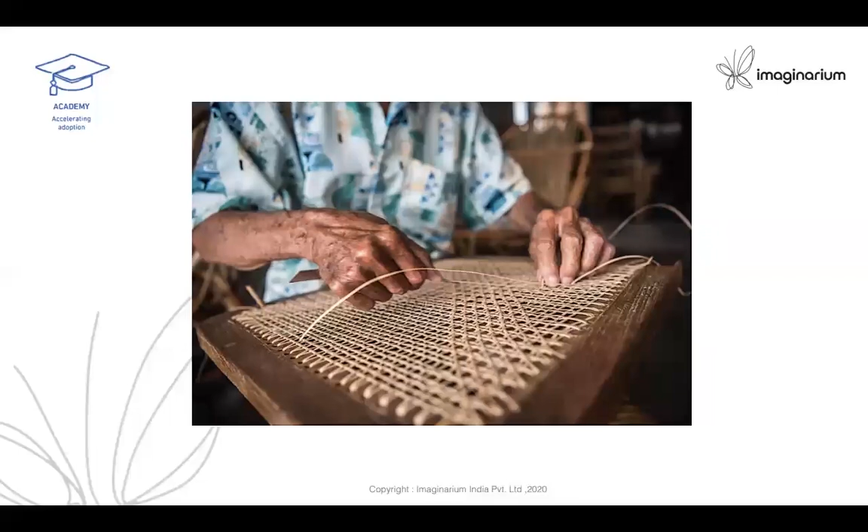and make sweaters for us, those kinds of things came. Even today, a lot of things are being done by hand, like making baskets, etc. And with all of them, one cannot make a thousand numbers.

Only a few samples can be made and sold. So the industrial revolution is a period when people wanted a lot of things to be made, sold, and consumed. That led to a different order, different types of technologies.

Man had to develop machines in order to do that. We all know that for a long time, pottery, as you see here, was one of the early artifacts made, and this was done in different ways.

It was made like on a lathe, where you put a thing and use a cutting single point tool to shape it, on a potter's wheel, as one shapes it even today. We also have another way of making things.

This is called pinching. You take clay and start pinching it, and it expands, and you get the entire pottery made that way. It's a vessel to contain something. It can be water, it could be,

I'm so sorry to interrupt you again, but I think the screen share has stopped again. On your share screen, do you see an option to share with attendees as well? We're getting complaints that it's not visible. No, I think the attendees have to pin it.

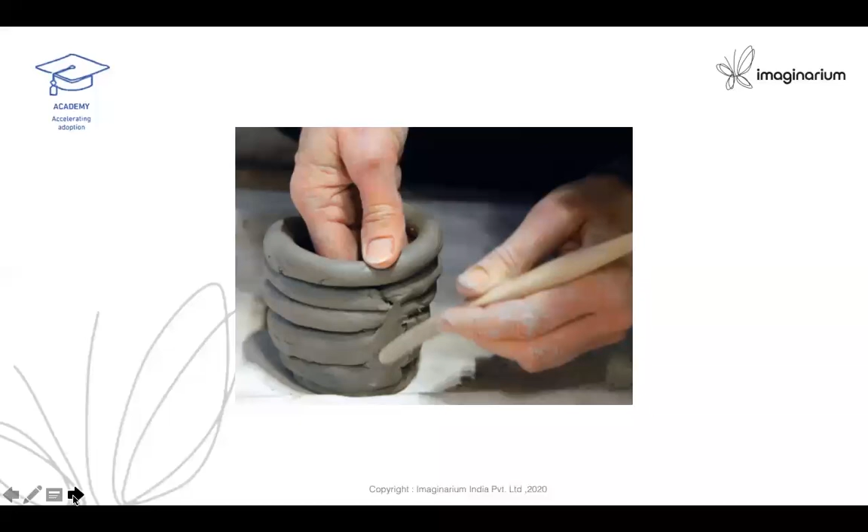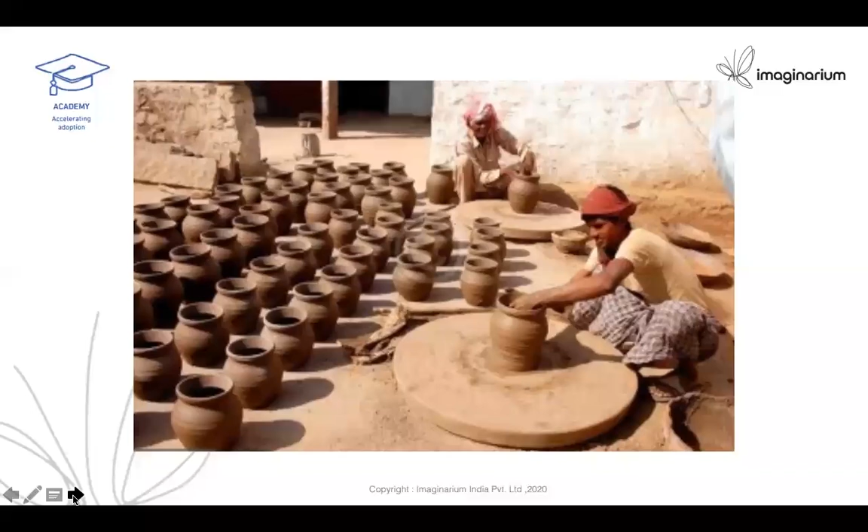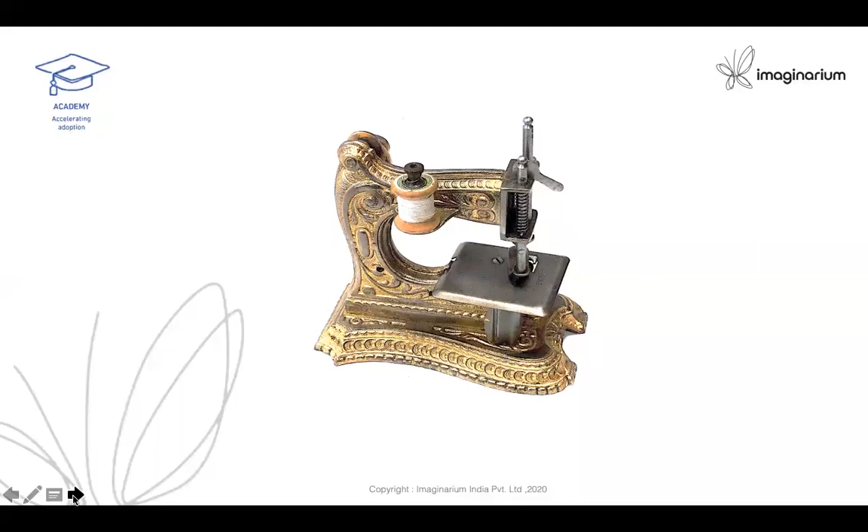See the ornamentation here, so beautiful. They depicted nature, and nature is the best designer. People used to have a liking for nature's flowers and animals, and they used to make them part of their lives. It used to reflect everywhere in their ornaments, in the house, the furniture, the utensils, whatever it used to have. The same thing you can see till recently - even machinery used to look like a very ornamental thing, like a piece of jewelry. What you see here is a sewing machine of the early days.

And then came the so-called different industrial revolutions which changed all this. Let us see. The production technologies can be divided into three main broad categories called plus, minus, and zero processes. Let us understand what these are.

The manufacturing process is broadly classified into plus additive manufacturing processes, zero or forming processes, and minus subtractive processes, in which you have so many things. Under plus, you have casting, welding, cladding, painting, plating, gluing, lamination, coating, and of course 3D printing.

Under zero process, you have bending, extrusion, drawing, forming, forging, coining, rolling, knurling, embossing - all these processes. Under minus, you have turning, shaping, milling, drilling, planing, broaching, trepanning, sawing, reaming, grinding, filing, chipping, all of them. This is like sculpting.

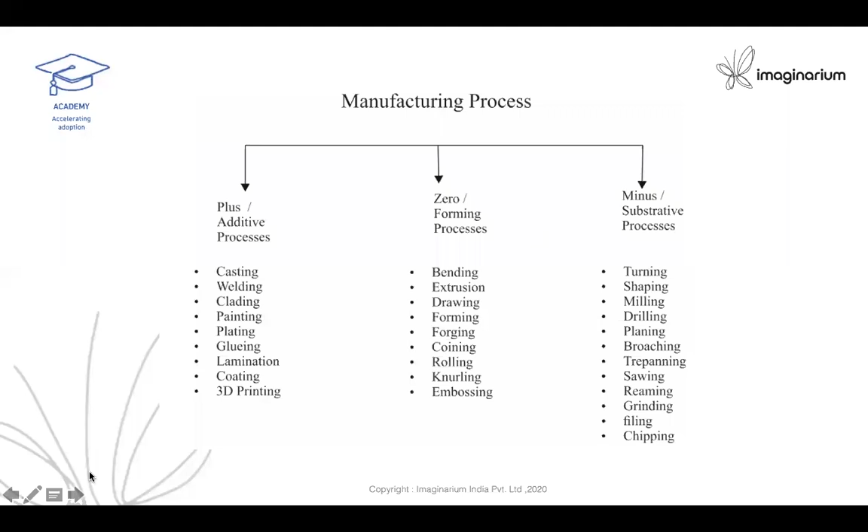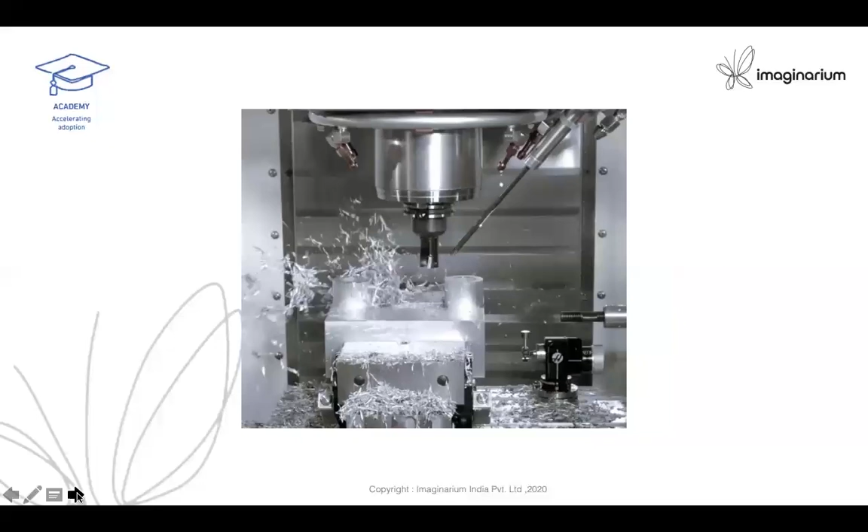This whole thing led to conventional manufacturing, which we normally call subtractive, where we remove chips out of metal and shape it, like milling, where we again remove material. All of this leads to a lot of chip generation. So this was not at all very good, to generate so much waste and remove a lot of material.

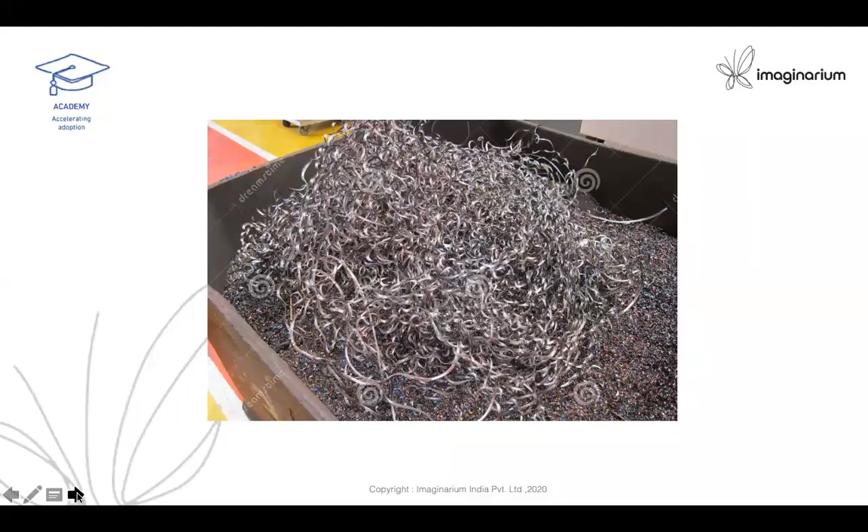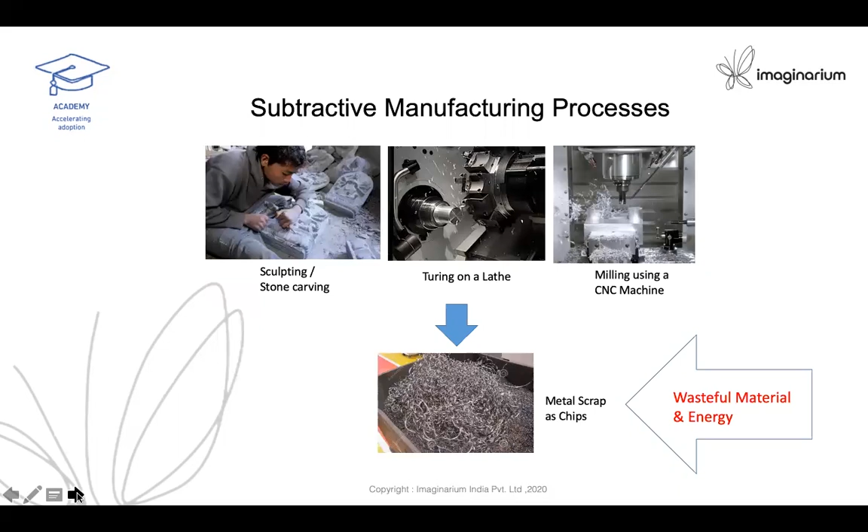So people thought this is a kind of process which is not good, and there were a lot of other ways of making things. Can we add material and make it instead? So casting was one of them, which was developed where you get the shape directly.

The Industrial Revolution 1 brought a lot of energy into human hands. So human hands were not shaping anything now. The machines were there - they were able to make a lot of things in a short time.

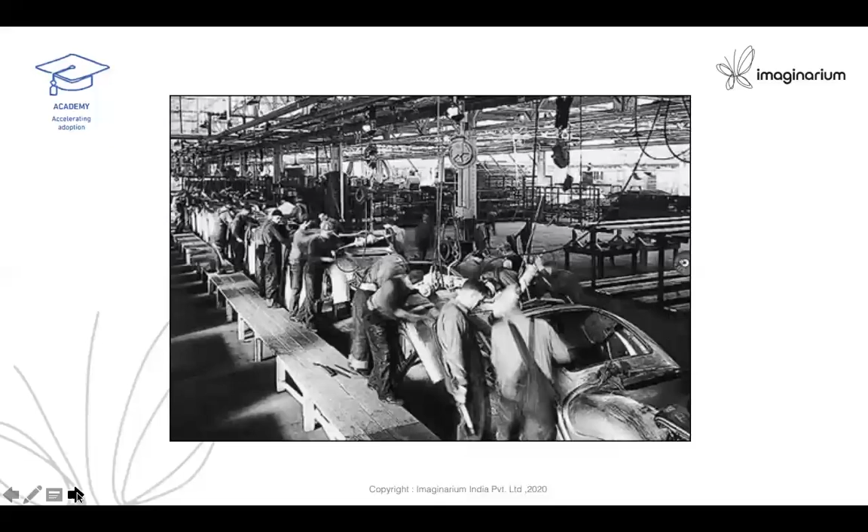Then came Industrial Revolution 2, which brought in the production line. The chassis enters one side of the factory and goes out as a car with four wheels, and the whole line is called the production line. This was implemented at Ford's factory. What you're seeing is an early Ford factory - a lot of people doing just some job, and it used to move forward.

This industrial revolution brought in a lot of limitations into the so-called production system. The ornamentation went off. In the world, we could only make horizontal and vertical things, or at best something round, something triangular, things like that.

This became a new aesthetic to the world. We started calling it a minimalistic approach. Today we have Apple, which is a great icon of the minimalistic approach of design. And very much like our houses, which are boxes today, we find everything which is a box. And we say creativity is out of the box.

Because all this came as a limitation of the process, the machining brought in these limitations, and the limitation became a new order. People said, okay, it is like the jackal says - if I cannot get grapes, I think grapes are sour, I don't like that. So we got used to this kind of new aesthetic, which is minimalistic, made up of horizontals and verticals.

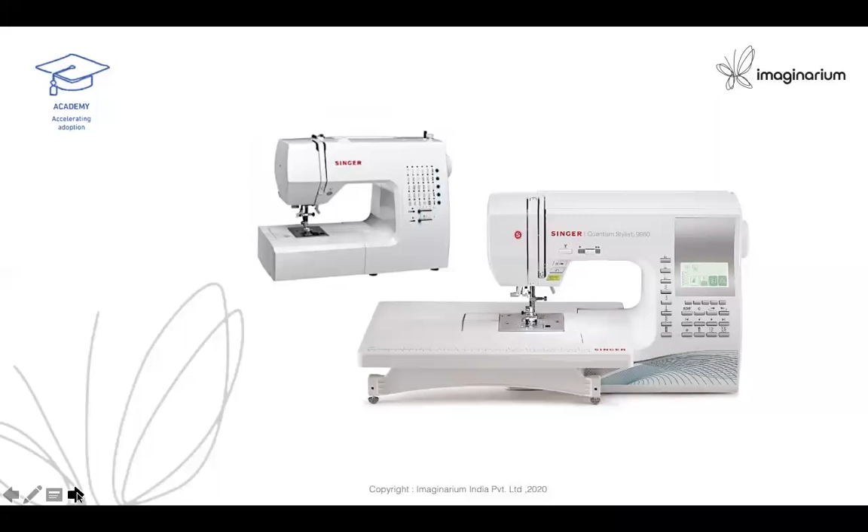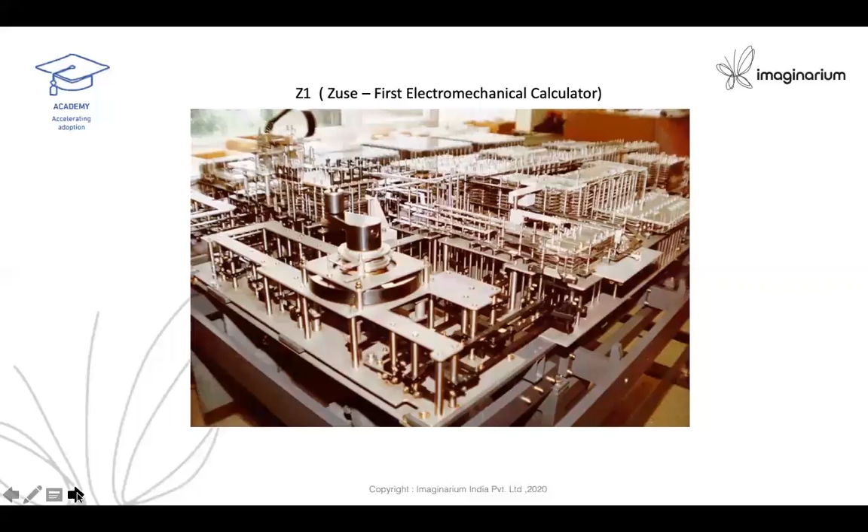Then came Industrial Revolution 3, which brought in the power of computer and computing power. What you are seeing on the screen is the first electromechanical calculator, which was huge, like a big room. It brought in a lot of things like automation, robotics, and telecommunication technology also got implemented - the development from valves to transistors to IC also came in the third industrial revolution.

Today we are stepping into the fourth industrial revolution, having crossed the first, second, and third. We are stepping into the fourth industrial revolution, wherein we are going to have autonomous robots doing everything, with very little intervention of humans required, and we call it a cyber physical system.

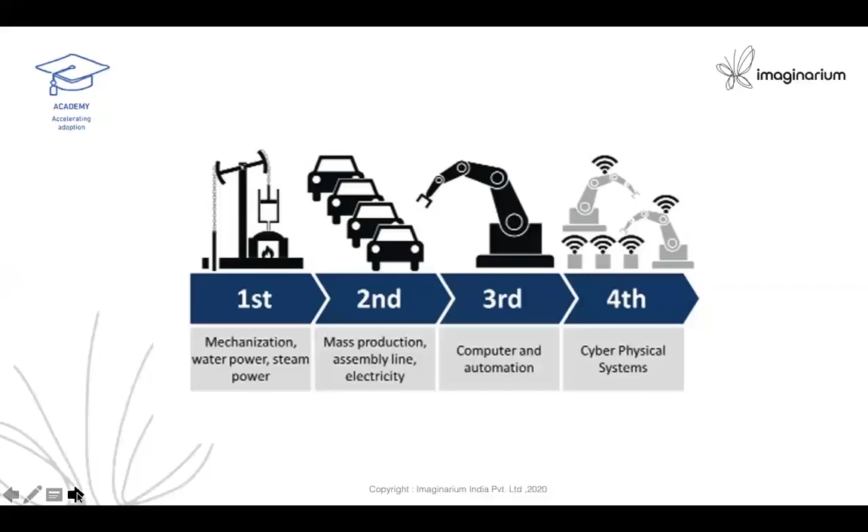Moving forward, today's topic is 3D printing, which we call the next big thing. For the last 30 years, it has been the next big thing. This is because it has to actually create value. Unless 3D printing creates value, industry and people will not adopt it. But today, I can say it has actually arrived.

People have got technologies by which you can actually manufacture. Additive manufacturing—sometimes I don't call it additive manufacturing because manufacturing is a highly loaded term. What is manufacturing after all? It is making millions, not making one or two or making hundreds. So additive manufacturing, I sometimes call it digital fabrication.

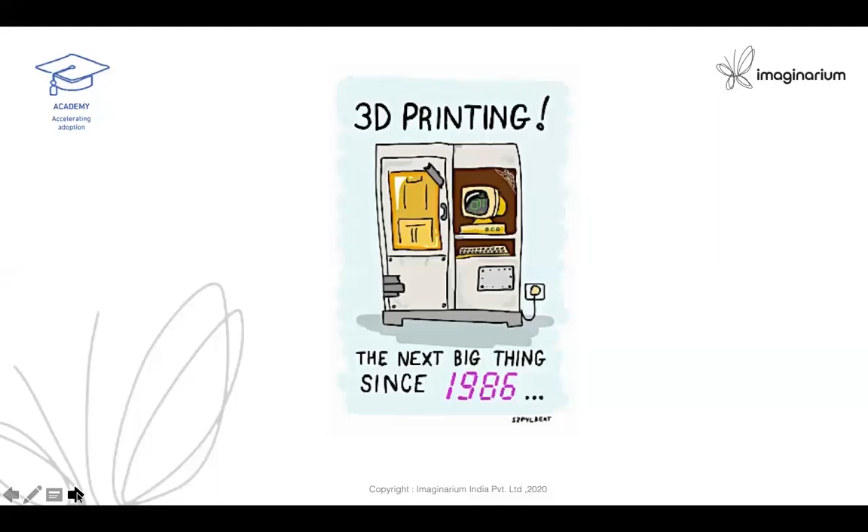Moving forward, in 3D printing we have the first term called printing. What is printing, by the way? Printing is a process of reproducing text and images. In case of 3D printing, it is a process of printing not only text and images, but also objects. That's where we call it 3D printing.

Sometimes people come and say, I want something 3D printed, and they'll give a small 2D artwork. Many times they think that it is going to be printed in 3D, because a 2D plane looks like a 3D. But it is not so. Many people have a misconception. So printing and 3D printing are way apart. They're not the same.

I can say in the world we only have printing, 2D printing. 3D printing is something which is an integration of 2D printing done over and over again.

Many times we call 3D printing also as additive manufacturing. And when you say additive, there are a lot of things which are additive in the world. Plywood is also made up of additive, but it is not 3D printed. Bricks, buildings are built of bricks like a Lego, and again, it is not 3D printing, but it is additive. Casting is also additive, but it is not 3D printing. Joining of metals like welding is also additive, but it is not 3D printing.

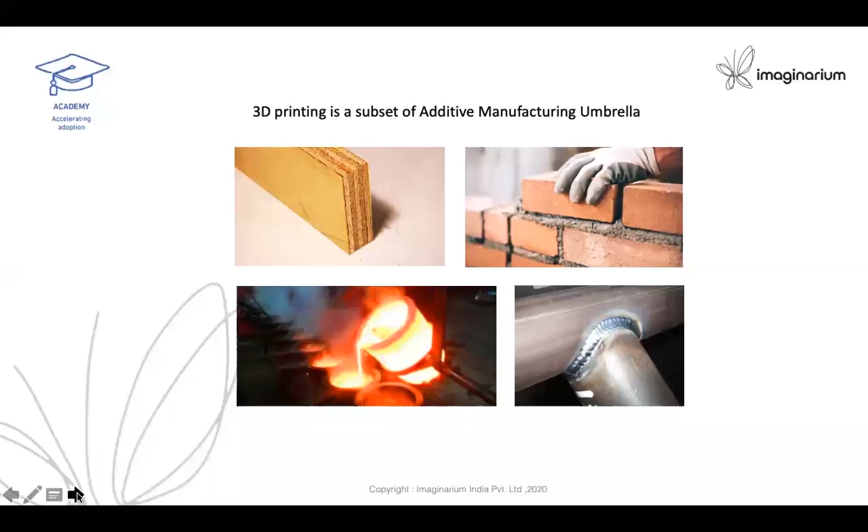So there are a lot of things which are additive, and 3D printing is a subset of additive. So 3D printing is a new way of making things, and many people think that 3D printing means it is made up of filaments. It's like a set of blind men going and touching an elephant, and whatever they touched, they felt so, and they declared this is what it is. Elephant is like a fan. Elephant is like a tube. Elephant is like a pillar, like that.

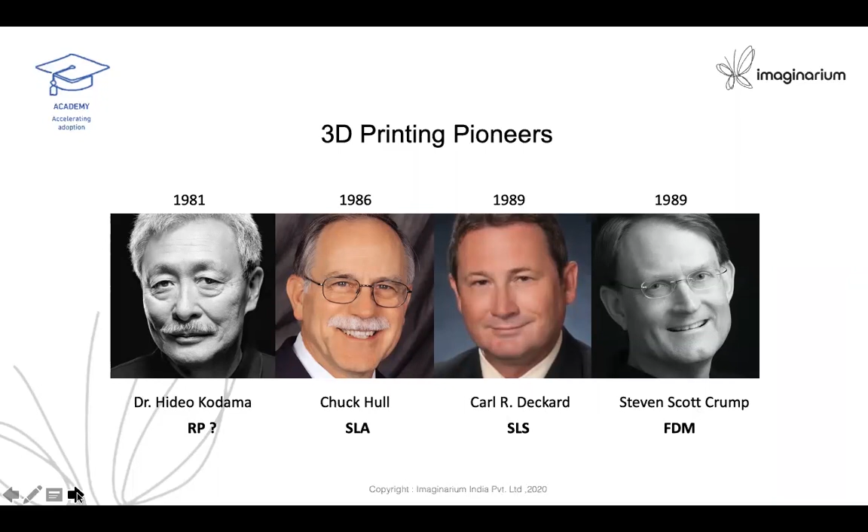So these are some of the pioneers who actually brought in all these different concepts, starting from Dr. Kodama, you have Chuck Hull, you have Carl Deckard, Steven Scott Crump, and many others you can see here. Emanuel Sachs from MIT coined the word 3D printing. At one point, 3D printing was actually a trademark of MIT, but soon he gave up the rights. The whole world today calls this process 3D printing, thanks to Emanuel Sachs from MIT.

He's a professor who actually created what we today call binder jetting. Coming to the inventor who got the patent, Chuck Hull from America, 34 years ago—maybe now it is more than 34 years ago. He called it an apparatus. He called the process stereolithography. So beautiful, the term—stereo means what? Stereo means depth, and lithography means printing. So the 3D printing, or depth printing, is what he said.

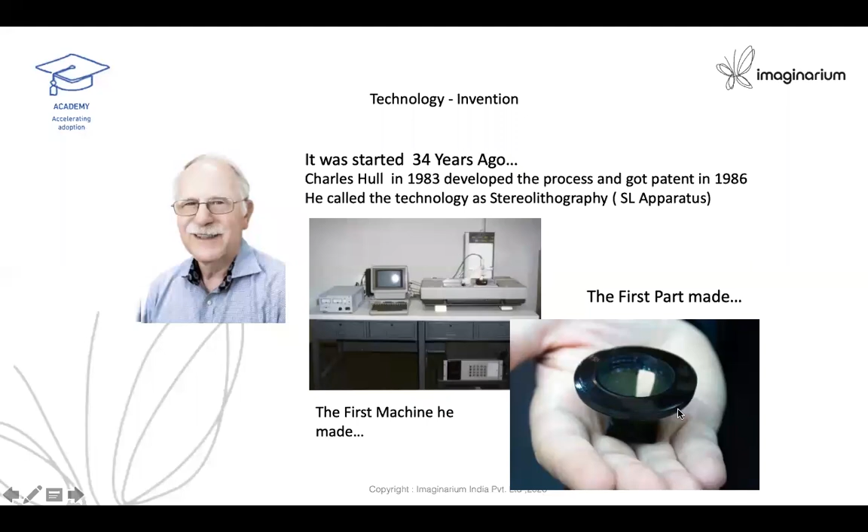3D printing refers to a set of technologies which help to fabricate 3D objects layer upon layer with the help of digital input data. The digital input data can be from a computer model, medical image slice data, or a point cloud out of a scan. If you have an object, you can scan it and get a cloud of points, and those points can be used to make a model. These are all inputs to do 3D printing.

If you see the block here for 3D printing, the first thing is the 3D CAD model. Without a 3D CAD model, you can do no printing. The printer needs this very important input. Further, it has to be sliced using software, and then there is generation of code called G-code that is given to the machine. After the digital model is sliced, the machine puts back the slices in sequence, layer upon layer, and what you get is the actual object. So it is like dematerialize and materialize later on.

So people used to call 3D printing a '3D fax' also. That is one of the terms given to 3D printing.

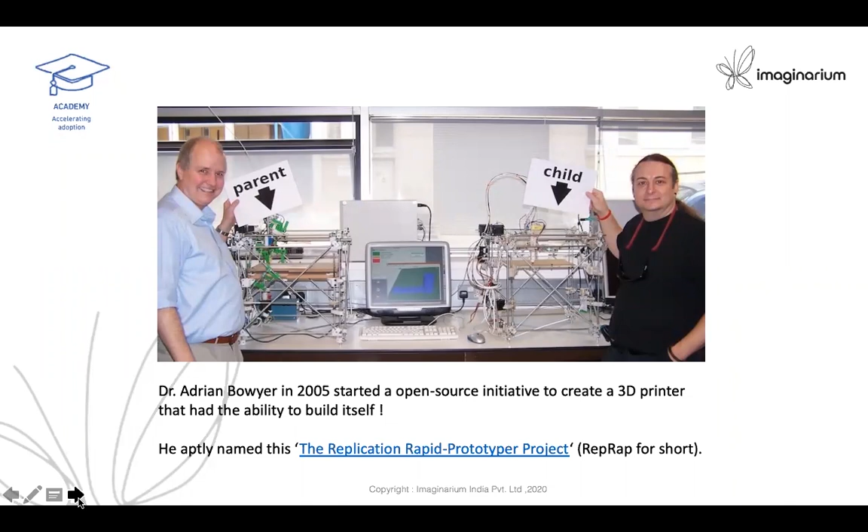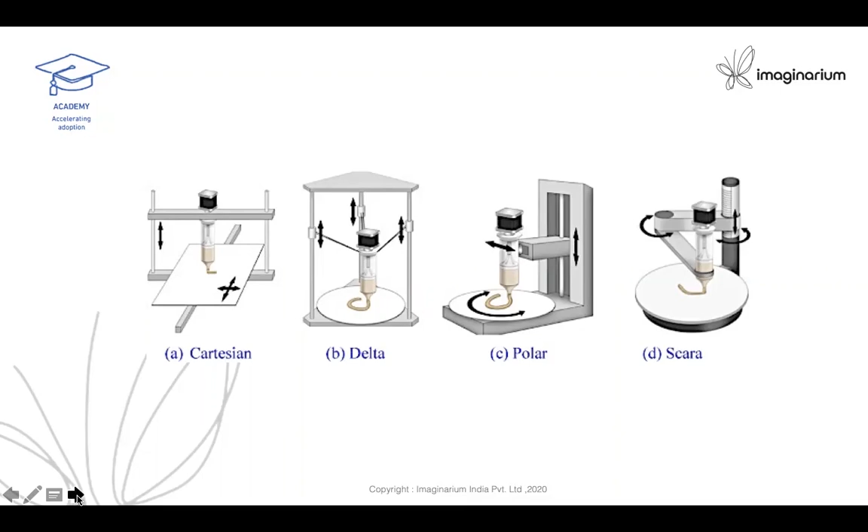Moving forward, Dr. Adrian brought the concept of a 3D printer printing itself. There's a cartoon showing a 3D printer giving birth to smaller 3D printers, and so on. He brought in the so-called open source regime, where anybody can think of it and do it. In fact, after this, the maker movement brought in different kinds of FDM. These are all the allotropic forms of FDM, fused deposition modeling: Cartesian, Delta, Polar, and Scara. Barring the first one, all of these are results of open source innovation, which has made the whole spectrum very rich now.

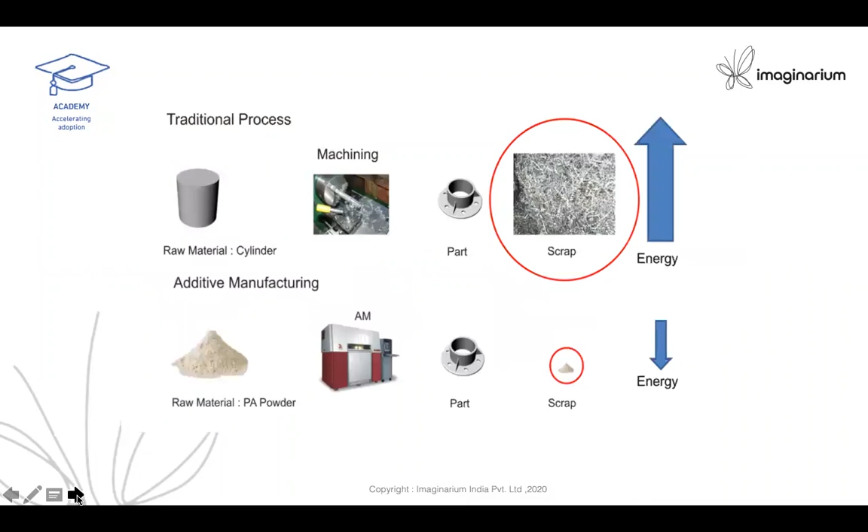If you look at the traditional process versus additive manufacturing or 3D printing, additive manufacturing uses less energy, and since it adds material instead of removing it, the scrap generation is very minimal. So we call it a green manufacturing process also. It is the act of converting CAD to part directly.

Moving forward, many times a 3D printer is not supposed to be just a box. This questions the stereotype or bias, the mindset we have for a 3D printer. What you see here is a KUKA robot, which gets digital data from a CAD system and is able to create an object here, there, and all around it. It's truly an out-of-the-box 3D printer, I can say. So by definition, even this is a 3D printer.

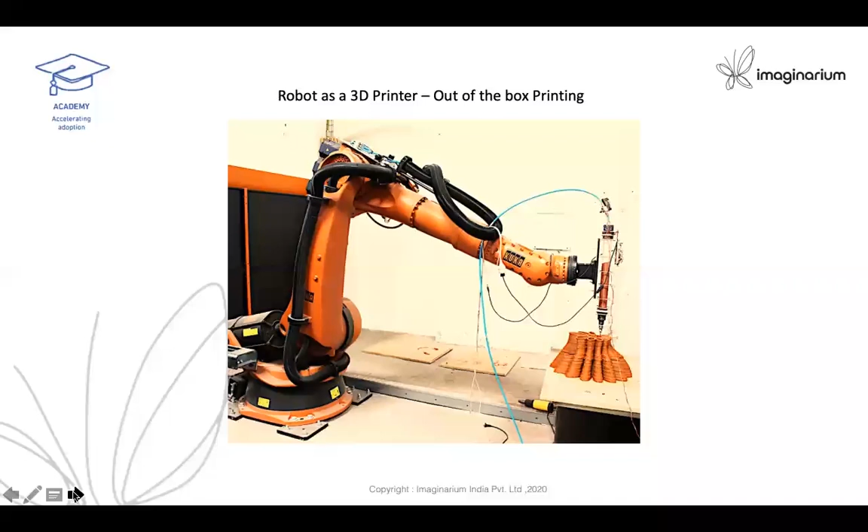So what happens if I put this in the hands of a robot, or make an XY table move it, or an XYZ system move it? Is it a 3D printer then? Of course, yes—then it becomes a 3D printer. So that's how we have to learn what is a 3D printer, and what can be classified as a 3D printer.

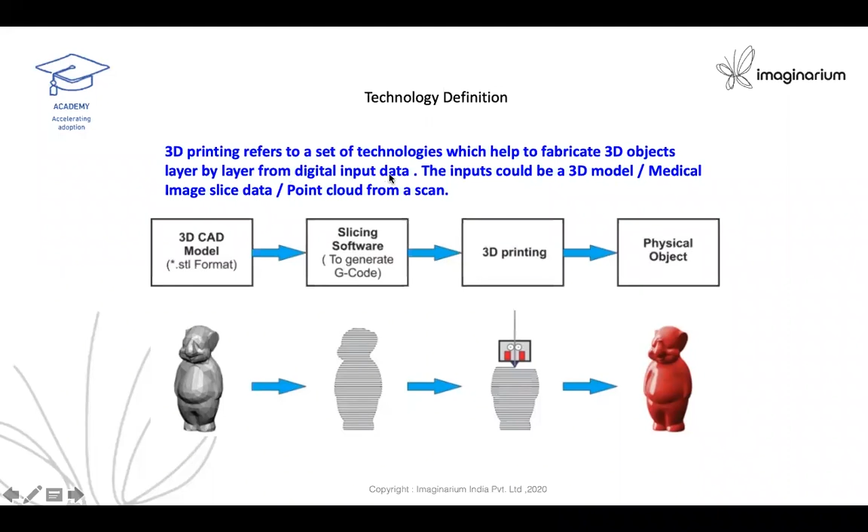Tomorrow, all of you can come out with your own examples, but you can go back to the definition: a 3D printer refers to a set of technologies which help to fabricate 3D objects, layer upon layer, from digital input data. Full stop. That's how it is.

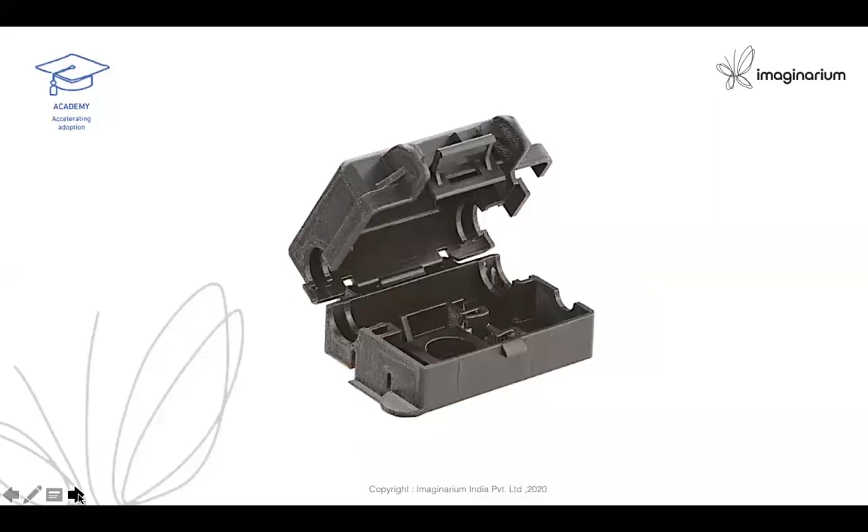In fact, 3D printing brings a lot of good things like assembled products. A lot of complex things can be combined together. We call it part consolidation. If you have a product made up of some 10 parts, we call it bill of materials - 10 parts required to make one. Today we can combine all of them, so there is no need for assembly, and people don't assemble wrongly. So there is a lot of mistake proofing that happens, and reliability of the system increases because you don't have too many variables. You have just one part, you fire one part and you use it, something like that. So that is the beauty of this process.

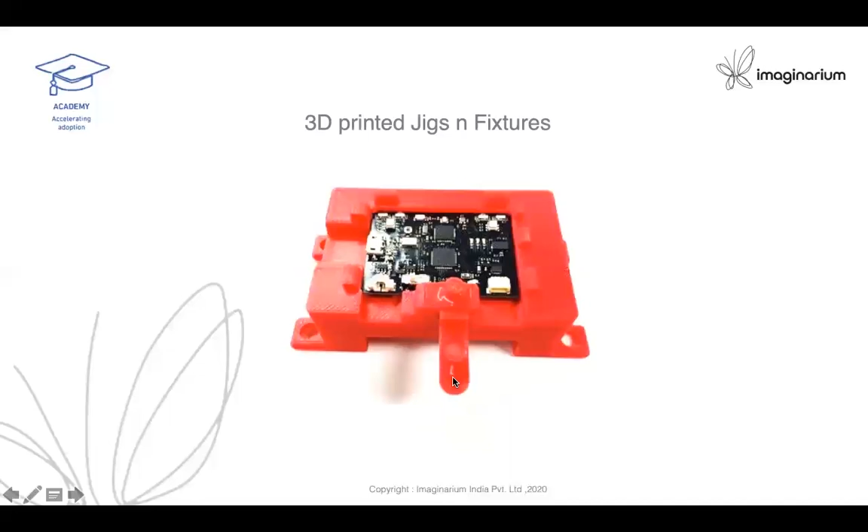And you can make quick jigs and fixtures like the one you see here. The red part is 3D printed with a PCB, and PCBs are constantly changing. They are becoming miniaturized every day. So how do you manage handling them? You can quickly design a fixture for that, and one can hold it here and move it to the next stage. So easy.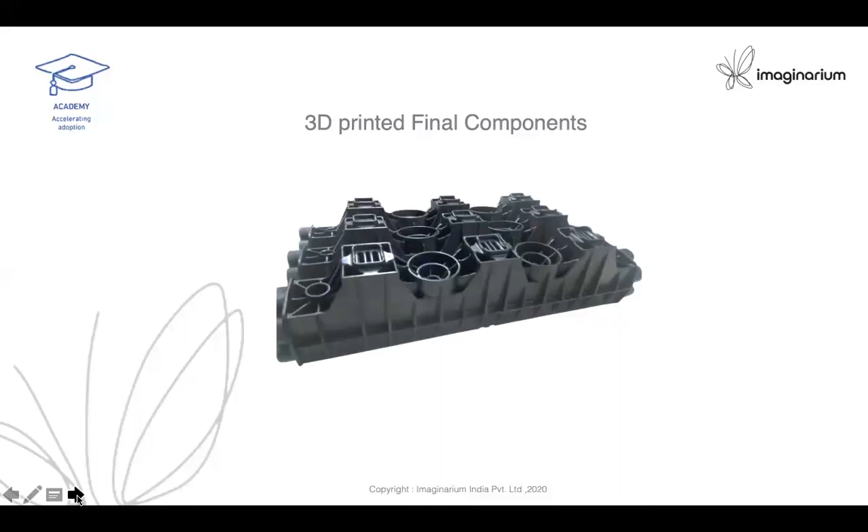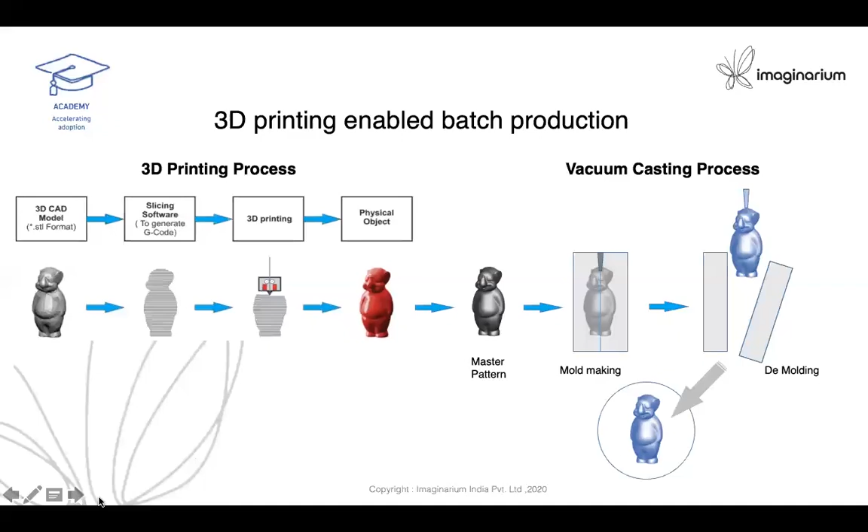So much so, 3D printed objects can be used as a master, and we can cut a silicone mold and take out multiple pieces out of it. So this is something like 3D printing enabled batch production, and we call it vacuum casting. I'll show you vacuum casting, how it looks. You can see here, this is vacuum casting, this is a silicone mold, you can see the pieces. Using one mold, we can take out different colored pieces - every time you inject a different color, you get these parts. And this mold can be made overnight, yes, just 12 hours, sometimes even less.

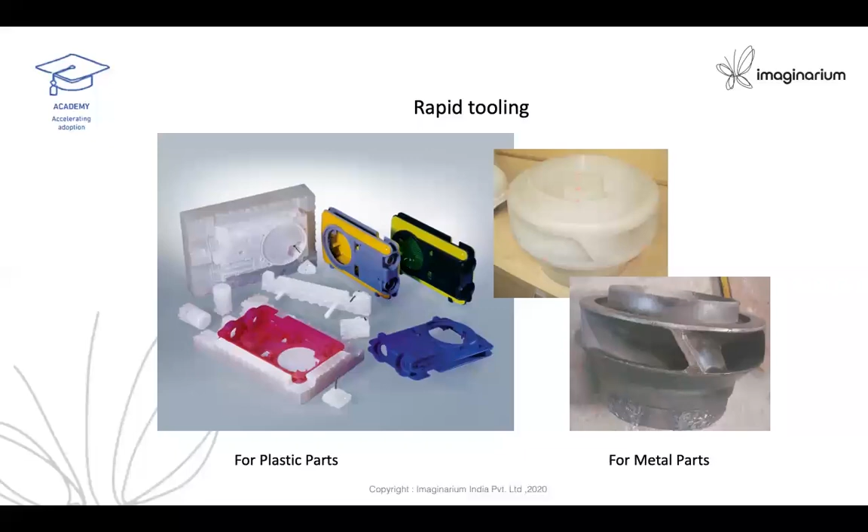Further, a 3D printed pattern can be used to cast metal like this. That is also possible. Today, people are able to cast in metal - all types of metal, titanium, gold, iron, tool steel, copper, aluminum, many of them.

In fact, we can also print molds. Mold is a means to an end, it is not an end itself. But today we don't require molds at all - if you can make a product without a mold, why not? But here we try to print a mold. So this is a mold printed at Imaginarium, and this also produces a lot of good outputs.

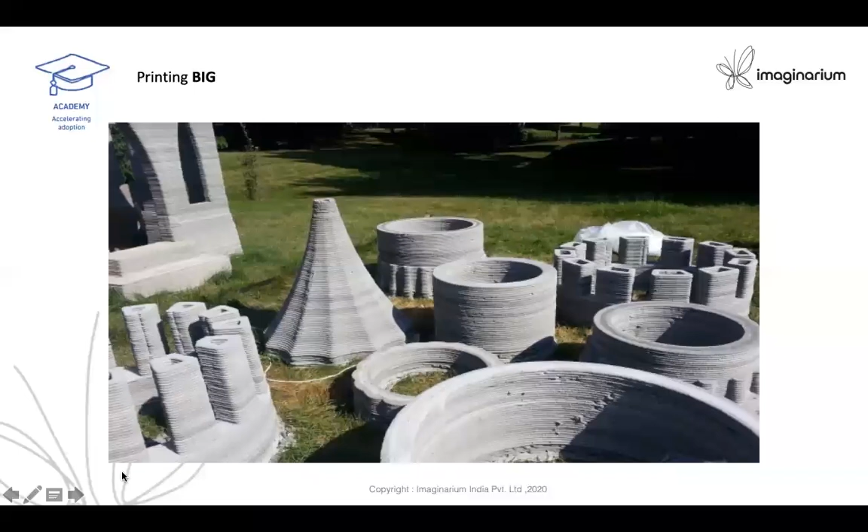What you see here is a large 3D printed object. Caption here: 3D printing big. You can see here very characteristic layer by layer marks. This is a part of a big castle. People are making it by parts, and that will be assembled. They're all 3D printed using concrete clay, concrete mix, ready mix. And what you see, if it is assembled, you can see a castle.

It has its own limitations, and you can see the Gothic style. You cannot insert a steel frame or beam here, so they have kept the overhang very less here. Triangles can be constructed, and these domes can be constructed. It has its own limitations, but it was done in 2014 - this is a demonstration of the capability.

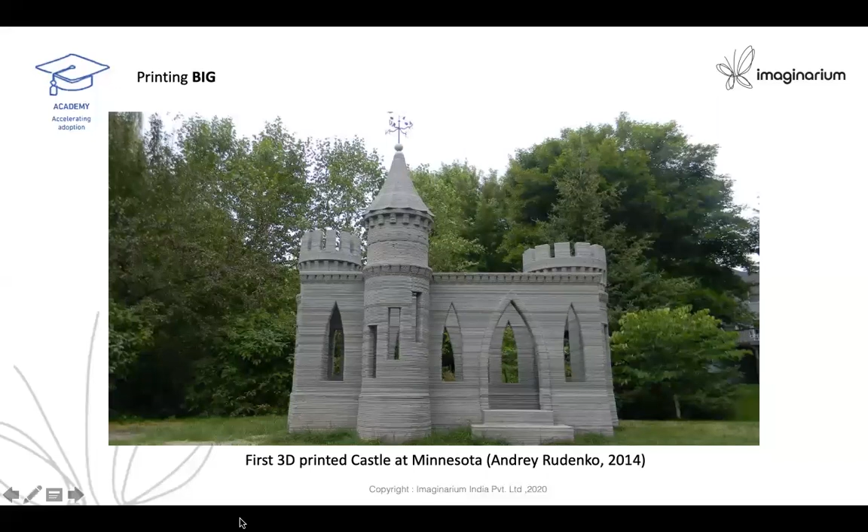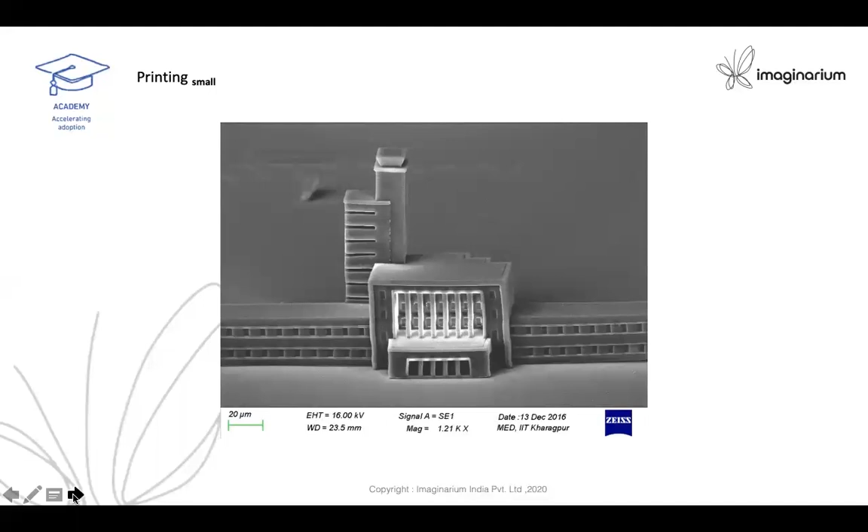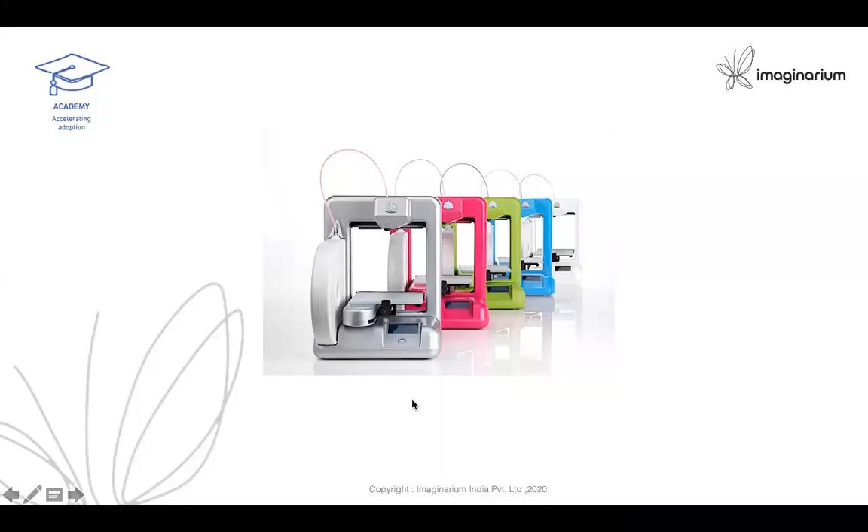In fact, in industry, except for a few 3D printers which are large installations, most 3D printers make small parts that are craftfully joined together to make big things.

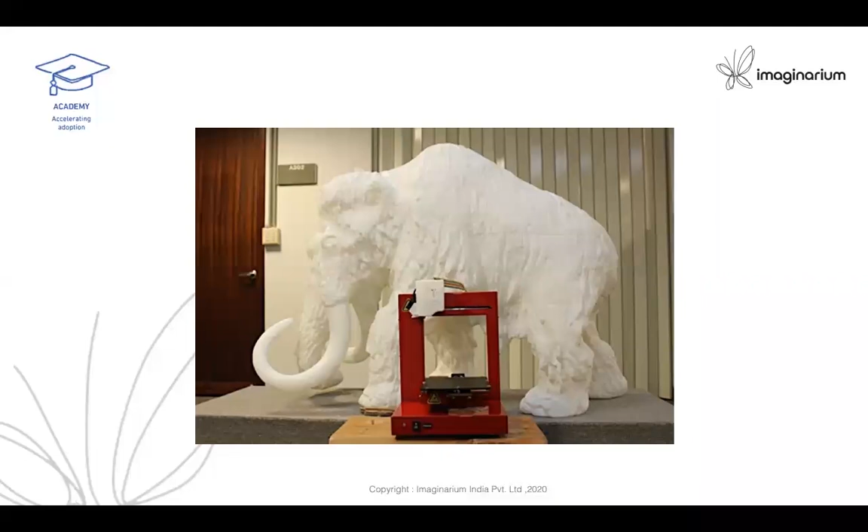Moving forward, people now have entire cell systems, wherein the 3D printer does the CNC inside, does the cleaning, and then it is ejected out. The interaction is through IoT or an external screen for manual override. Otherwise, you don't have to enter and do anything with it.

Such capability is already being provided, and in future, the order of the day will be industry transforming into small container-looking factories. Such a factory can do anything - food, drugs, cloth, whatnot. So the industry of tomorrow will look like this. The shop floors will be very neat and clean - no grease and oil. That's how the future factory will look.

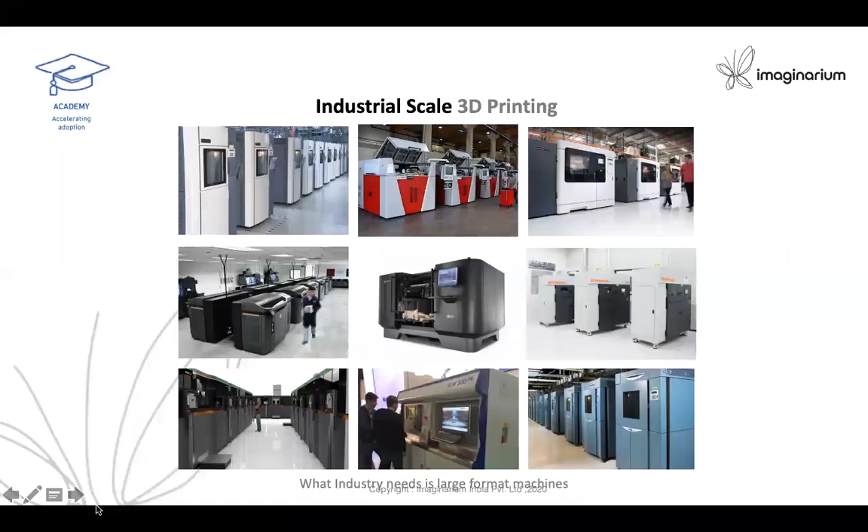It's very important to know this technology's arrival matches with today's emerging customer. Who is the new customer? It's not you and me. It's actually the children born today, or born months or years back - the millennials onwards. They have a different kind of mindset. They've got everything on a platter, and today we have these millennials.

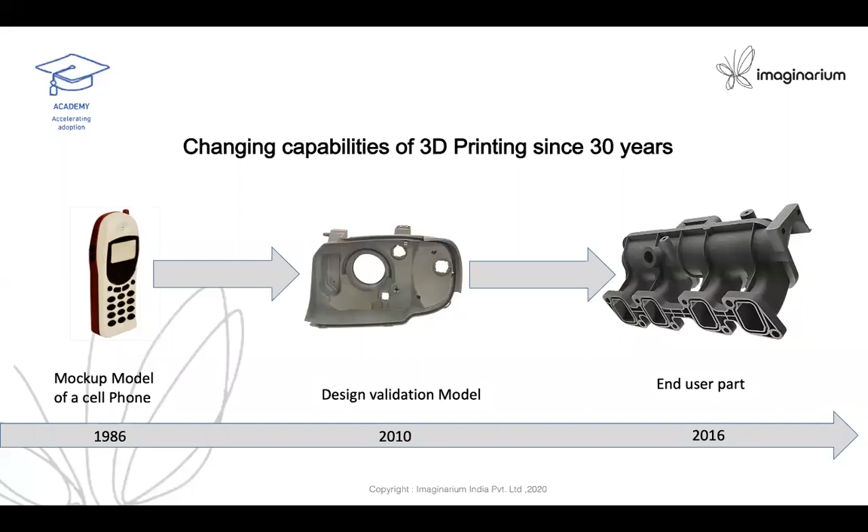They want everything to satisfy their personal needs. They want to stand out in the crowd. They want everything to be not only customized but individualized too. This is made possible because of the capability 3D printing has gained over the years. Earlier it only had the capability to make a mock-up model, a dumb model like the cell phone, and later a design validation model, which was accurate and gave feedback about the product and design for improvement. Today we have end user parts - such is the capability. So today is the right time for the new customer who wants everything now. This is the significance of the new customer who wants to stand out in the crowd, and it takes all kinds to make this beautiful world.

So in order to serve them, manufacturing has to be very agile - complex geometries on one side, needed in very small batch quantities. With a big factory, you cannot deliver it.

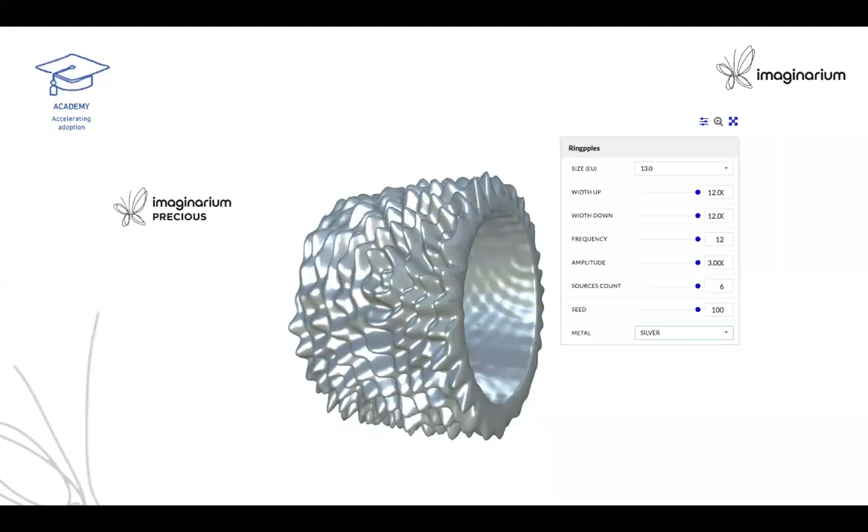I can have a product like this, and I can keep changing the dimensions to get different objects. Same way, let us apply this to a ring, a simple ring. You can see on the right side the table. As and when I change the slider, the object changes its dimensions. You can see how, if I play with frequency and amplitude, a simple thing changes. If I change all complexities, I'm going to get a very weird looking ring, and I can still modify it, even to have a simple design.

So converting design into a kind of user experience, where the user feels that he is designing, such things will come into picture in the future. Parametric design is going to enter the world in every aspect, not just rings, everything: your drinking water, your car, your furniture, your dress, your spectacles, jewelry, your accessories like belt, then watch, everything can be done this way. So the designs will be curated, and people are going to enjoy life, and they will feel that I've designed my product.

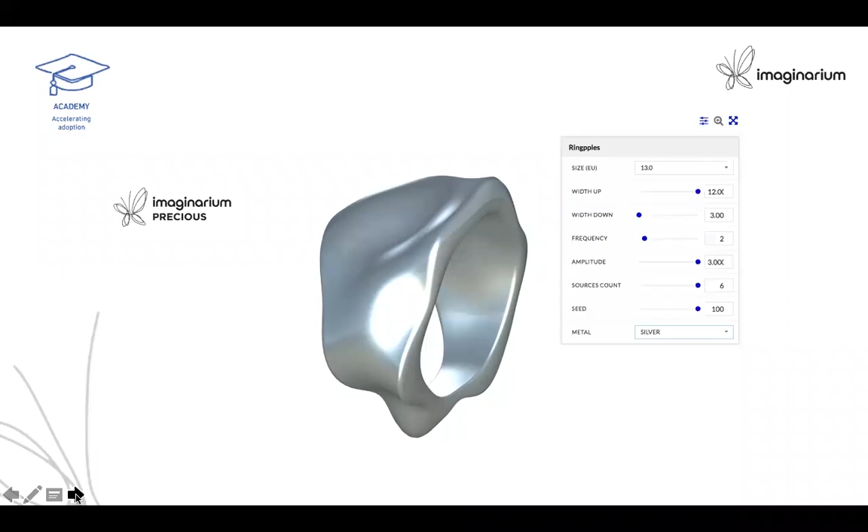You can see, so design will lead the consumption. Manufacturing would be taken for granted. Who bothers how it is made, after all?

And so the whole digital switch will happen in the supply chain management. Supply chain will become demand chain. Somewhere in the world, somebody sitting in one corner will order something on the cloud, and somebody is there ready to make it for them. And he pays online, and you have this transaction done. So this is called demand chain.

Today, 3D printers come in all sizes and shapes. Every technology has its own unique way. What you see here is some of the different systems we have at Imaginarium. So if you reach Imaginarium, you reach the world of 3D printing.

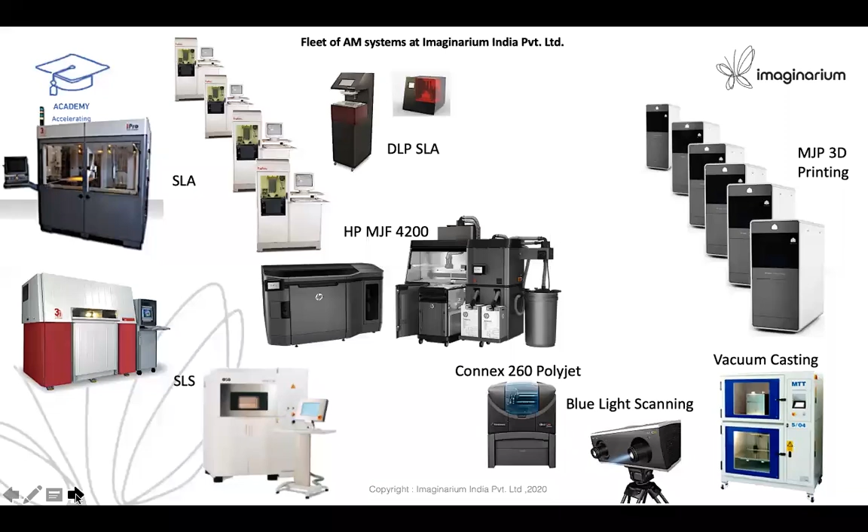And the future of 3D printing is moving beyond prototyping to the end user part, the product itself, which you can use for the entire life cycle. And this is made possible by some of the technologies such as multi-jet fusion.

This is a product from HP, Hewlett Packard, the printing people, who also make a lot of IT and computer hardware. They had a lot of patents actually in the early days on 3D printing. They were not 3D printing themselves; they were licensing it to others. Then, as a strategy, they changed their approach and said, 'Why don't we also do 3D printers?' And that's how they came out with a new technology called multi-jet fusion.

What is the beauty of this technology? It gives you speed, it gives you quality, and at a reduced cost. This is a kind of an impossible triangle for manufacturing: getting speed, quality, and a better cost, all together.

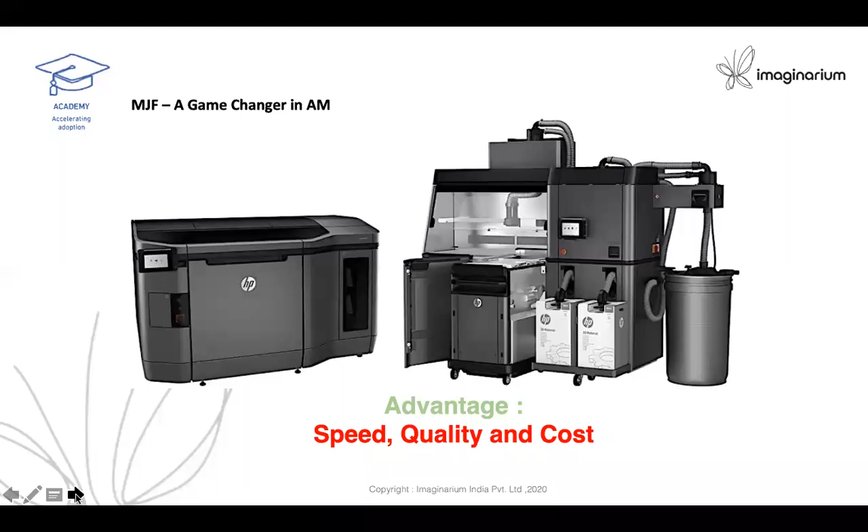Today, in the whole space of 3D printers, small, medium and large sizes are there. They'll all be maintained and run by the OEMs, while the small individual designer, maker, or artist will go to a cloud factory. Cloud factory means people don't have to worry about what printer, how it looks, or whom. They just have to upload a file and get it delivered to their door. Such is the change that has happened. Even Imaginarium has a cloud factory.

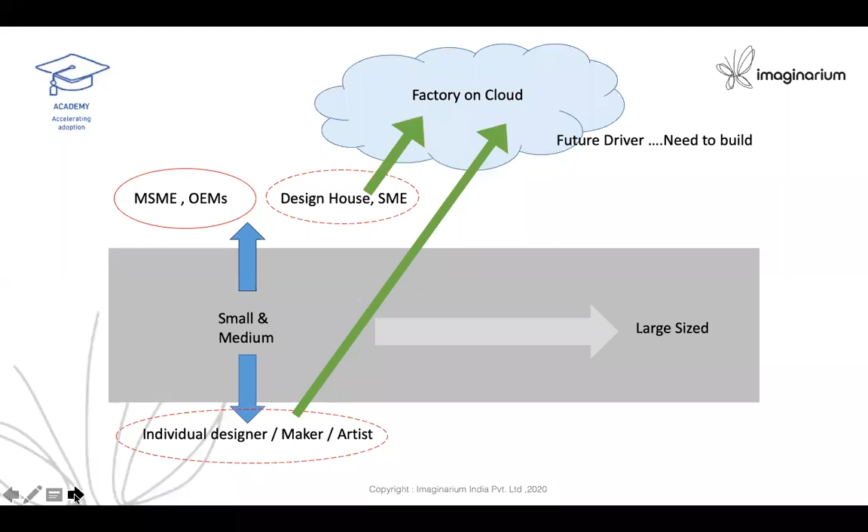If you type www.imaginarium.io, you will get a cloud factory, and you can actually get into that and try it. It will be fun. In fact, 3D printing has one disadvantage, and it has got a lot of advantages.

Now, what is the disadvantage? The main disadvantage we have is that there is no economy of scale. What is meant by economy of scale?

Unlike 3D printing, if you take any large scale production, for example, what is the price of your water bottle's cap? It's very, very less. Why is it less? Because they make millions of them. Because they make millions, the landed cost becomes very, very less. Whereas in the case of 3D printing, because every part is built layer by layer, it has got the same time to manufacture, the same type of material, so you don't get the advantage of scale. So we say there is no economy of scale. That's one disadvantage we have.

But complexity comes for free. Complexity means if you want to make a cylinder or a very complex, floral thing, neither will be considered complex for a 3D printer.

Whereas for conventional manufacturing, if you make a cylinder, it will cost you less. But the same cylinder, if you make it very ornate, then it will cost you more. So the more you process it, the more you have to spend. The complexity, that way, gives a lot of advantage.

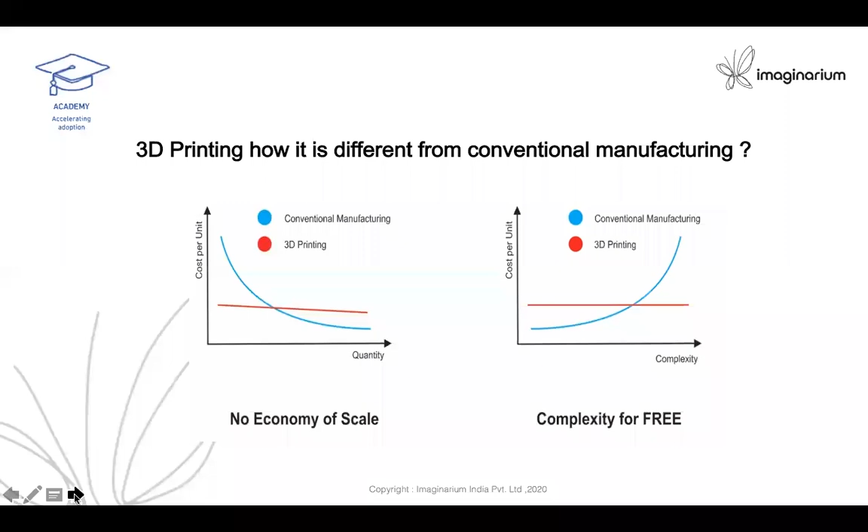So in some sense, making one-off 3D printed objects is always advantageous, where economy of scale is not there. So you better make small batch quantities and use it for making complex objects. Then you have advantage.

Earlier, all products and enterprises go through a systematic innovation methodology. We call it NPD, that is New Product Development Framework, where they address a need. After need analysis, they ideate, then they screen using some criteria. They go for the detailing of the design, getting the material, the size, the process, everything in detailing.

Then after a design is made, one has to necessarily test it, and that's where you need a prototype. So prototype testing was always a big thing. You need skill to make the prototypes first, and then you have to test it. And if it is failing, again you have to make a prototype.

So it used to take a lot of time to make the prototypes, and 3D printers came to be called rapid prototyping machines. Rapid prototyping, people used to call it, and then before you go to launch, ideas are always, ideas need to be tested. Why do ideas need to be tested?

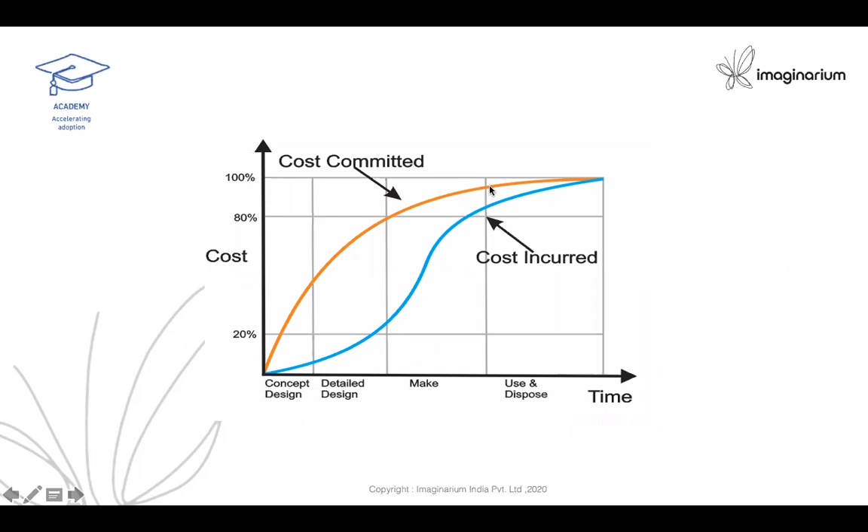What you see here is a business case for why ideas have to be tested first, because at the conceptual stage, the cost is very less. This is the cost. Y-axis is cost, x-axis is time. As the time passes by, in concept design you have partly spent it, then detailing. Then as you tend to make it, a lot of cost is involved here.

So it's very important to test an idea by making it. It's always de-risking the business in order to test an idea. Ideas are tested early so that you don't spend more time on it, and don't spend a big fortune on it.

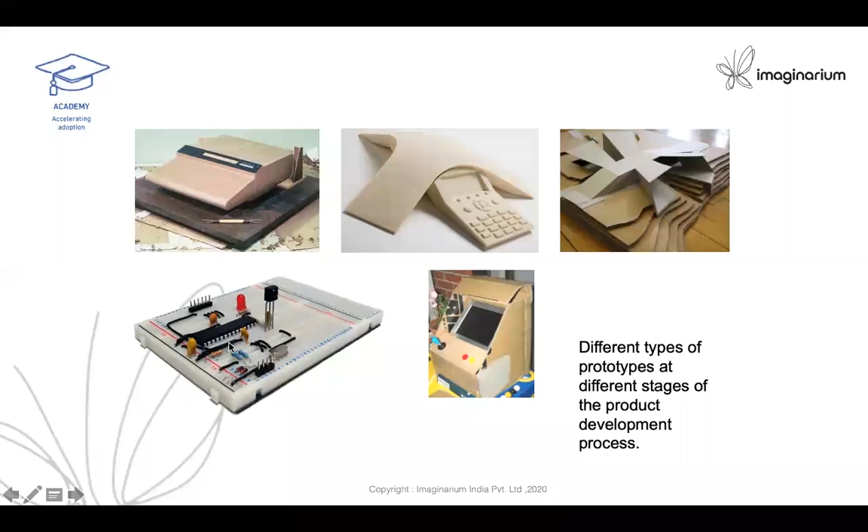So you have here a clay model of a cash register. You see a puff model, and here you see a cardboard model. Here you have a breadboard electronic circuit being tested. These are all prototypes, and they give feedback. And depending on the feedback, they go back to design and they modify and change. So NPD has a lot of such things.

With the advent of computers, of course, we could do everything on computer. Computer animation and even computer testing simulation we could do, and we could check the kinematics by animation on the screen. But when you tell anyone, your boss, your venture fund, the funding agency, you cannot tell them I've got a computer model and it works fine, please fund me. They will say, no, I want to see it working.

So real touch, touch and feel is very important in order to gain confidence of the venture capitalist or the bosses or the management. And so it's very important to actually make it. So making is not solved by these virtual objects.

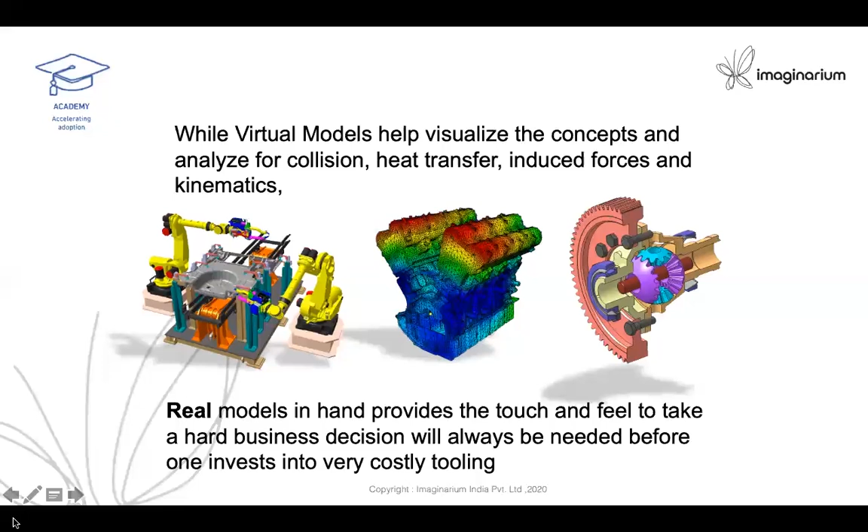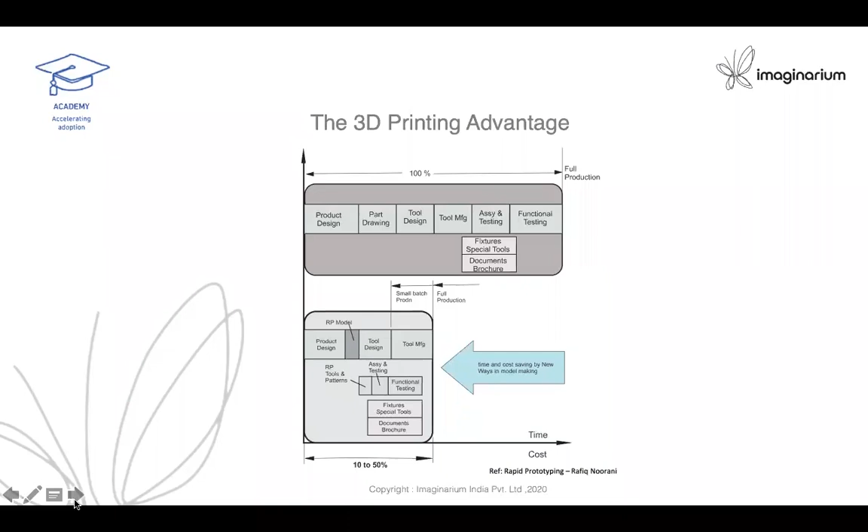Today, the making cycle time has greatly reduced. What you see on the top is it used to be a long time. By using 3D printing, the cycle time has reduced, and that is because skilled labor is not required to make a prototype, and it doesn't require any special fixtures, and it doesn't require a very high skill. Even a semi-skilled person can operate a 3D printer because it is an advanced technology wherein CAD directly takes care of many things.

Now, let me become a kind of devil's advocate. 3D printing is not good because it is costly. 3D printing is not good because a 3D file is needed. It is a time-consuming process. There are few materials available. It always needs post-processing, directly you cannot use it. And a 3D printed object is only good for making prototypes.

But all these things have changed. They are becoming cheaper, and many file formats are being used directly, and they are becoming faster, and there are 500 plus materials available today, and there are automated post-processing processes available today, which are controlled by robots. In fact, for dental implants and such, the processing is done by non-human means, so there is no contamination in the process, and post-processing also is getting automated. And today, what we make cannot only become a prototype, but a prototype you can sell as a final product. So such is the capability today that we have got.

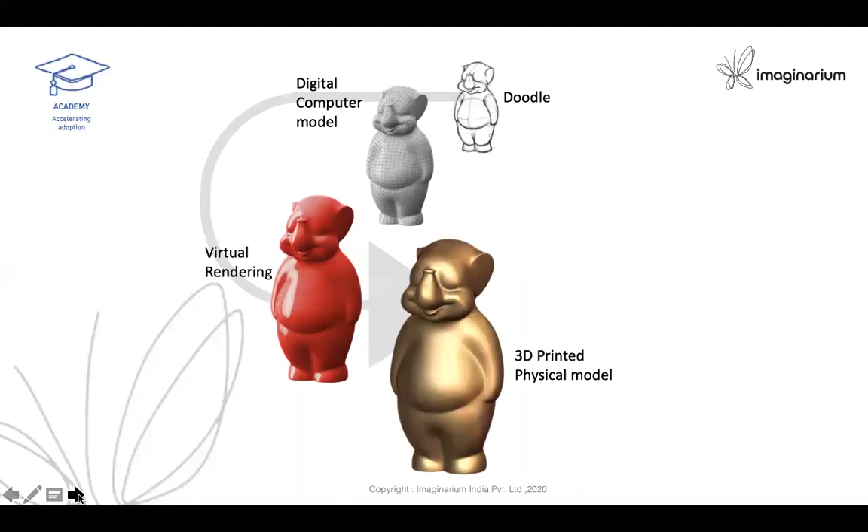So if you ask me, 3D printing is in the center, but there is a lot to do with other things. Without them, 3D printing is not possible. What all is required to fill this spectrum? It starts with an idea or a design. Without an idea or a design, you can do nothing. Then you have to make a 3D entity, content creation.

For that you need CAD knowledge. People may want to use Fusion 360, Windchill, Creo, CATIA, SolidWorks, or any such tool. CAD also needs a lot of thinking, design for additive manufacturing as an input, because people have been in an inertia of thinking for a hundred years now. They don't know how to make use of the goodness of 3D printing. Many times they think of the constraints thrown by conventional manufacturing.

So DFAM, Design for Additive Manufacturing, is a new body of knowledge, an approach to unlearn the conventional way of making and learn a new way to take advantage of this new technology. That's very important. After CAD...

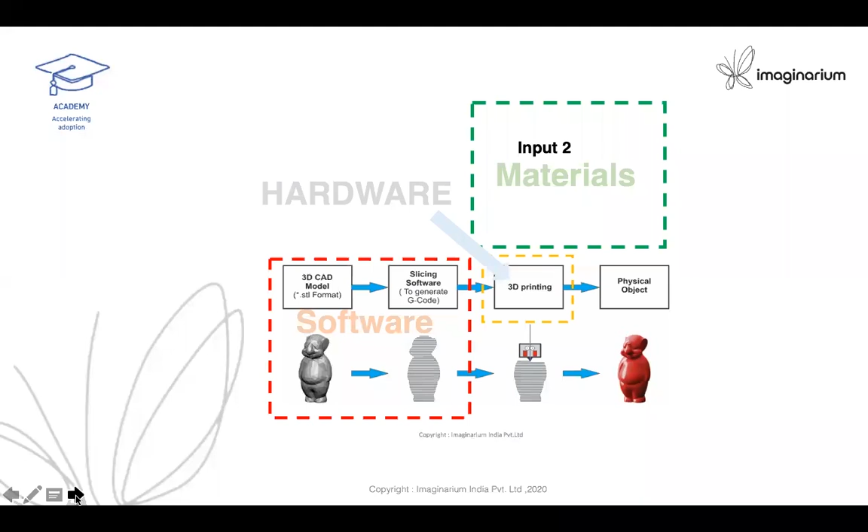So we don't study much on the hardware itself, but on the software side, a lot of scope is there, and on the material side, a lot of scope is there. So in future, careers in software for 3D printing and allied things will have great scope. And on the other side, materials scientists, material processing industry - there is going to be a huge scope. And moving forward in medical, you can see there are huge applications.

So as they move on, the risk level and the responsibility increases on the part of the technology - what it can deliver, how it is made. And at the end, you have people trying to become God himself - that is, making the building blocks of humans or animals, making skin, making an ear, making a kidney, and all. Today many people walk into Imaginarium and ask, can we get a kidney?

I said, why? You want a kidney? You don't have one? No, no, just like that. No, we learned on YouTube, somebody's - Professor Atala is printing kidneys. So we tell them, no, no, it is all kind of lab research work going on. Nothing is ready till now. So the God is playing hide and seek here. Though we can grow tissue on a petri dish by culture, cell culture - what we call tissue culture - it is very difficult to vascularize these, and that's where we have a long way to go.

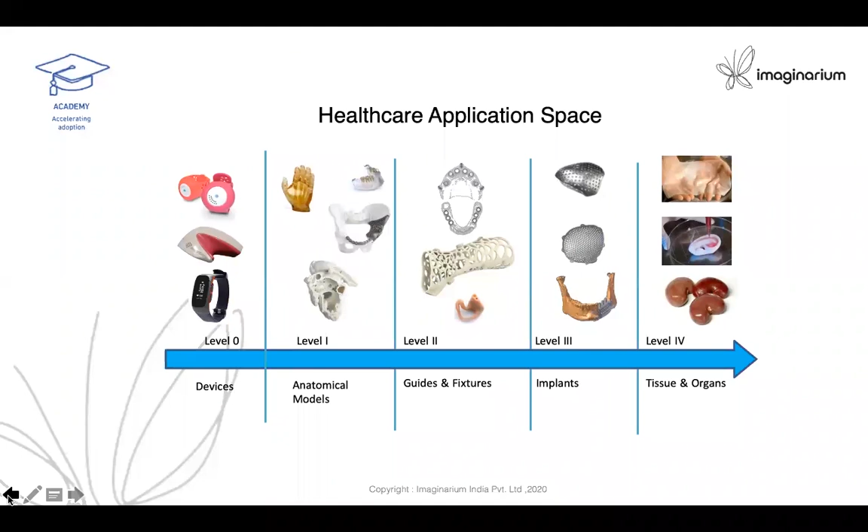Well, as you see the spectrum here, let me take you through it. I was giving a challenge to schools and high schools - I'll give a 3D printer to you freely if you tell me what you're going to do with it for 365 days of a year, but you should tell me now. People started writing what they will do, and they could not make even 10 items in the list. That means it's very important where you are going to apply it, and application comes from a need.

Nobody will give you a CAD file. Okay, if you want this, you take it. They will not. Of course, there are some things available on the internet, but if you want your own things, you need to create them. So you have to learn.